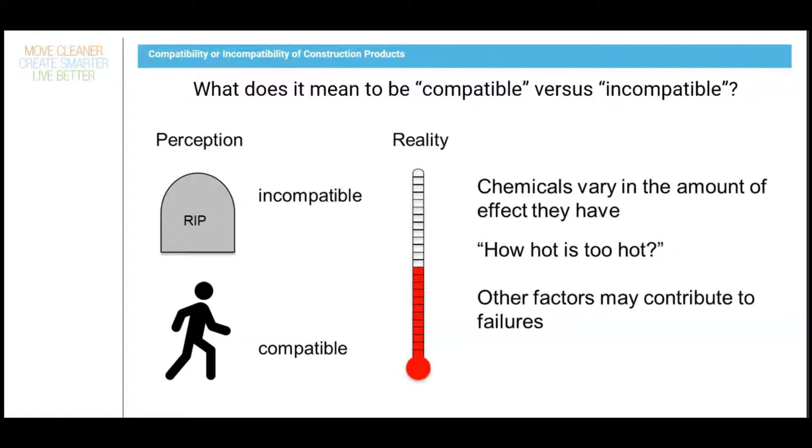So, you know, we're all familiar with the fact that metals can be sensitive to oxygen in the atmosphere, salt, especially if you live near the ocean, water, humidity in the air, or water from leaks in the building, something like that. The quality of the water, if the pH is too high or too low, microbes growing inside that stagnant system. Everybody's seen the effects of galvanic corrosion here and there, and stray electric current can also affect metals. Some of you may have switched to CPVC in order to combat some of these effects that can cause metals to fail.

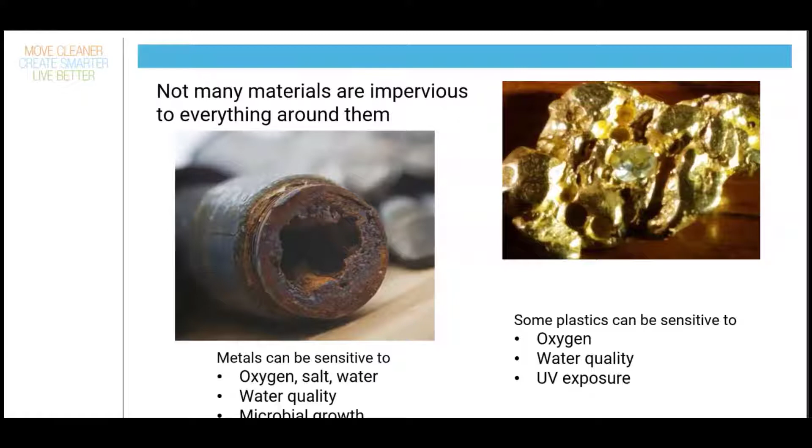So some other plastics can also be sensitive to some of those things: oxygen in the atmosphere, the quality of the water that you put into the pipe, and UV exposure from sunlight or from some types of lighting in buildings can also affect certain types of plastics. CPVC is really, really resistant to those types of environmental effects. So if you'll move to the next slide, Lainey. Those types of things that are out of your control, like whether there's humidity or salt in the air, whether the pH of the water is too high or too low, whether there's UV present around the building, those things that are kind of hard to control, CPVC is actually highly resistant to.

And in the fire sprinkler industry, You may not know that CPVC is also used in industrial applications. We make industrial pipe out of it as well. It's used for handling really strong acids, really strong caustics, peroxides, very corrosive chemicals. And in industrial applications, it's frequently installed outdoors for decades without any problems. So it's really resistant to those kinds of things.

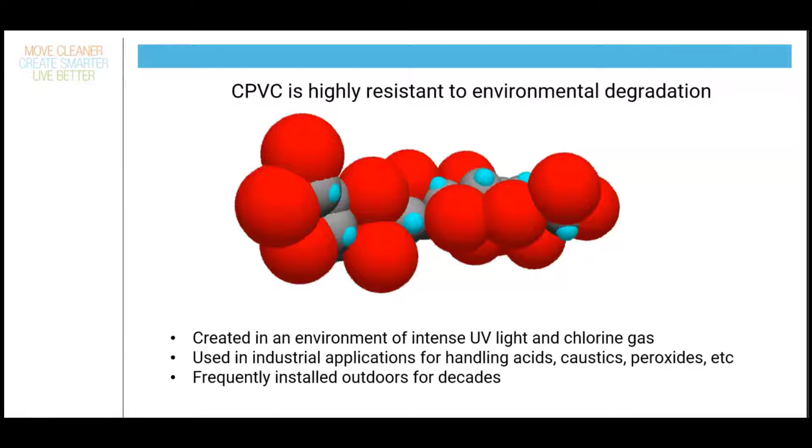However, CPVC can be caused to fail by a process called environmental stress cracking. And that can be triggered by a few types of chemicals that can be found in construction type environments. But in order to understand how that occurs, we need to understand what's holding that plastic together as a solid. And so we're just going to touch on this really quickly. And we're going to start on the right side of the screen.

Some plastics, like that fiberglass ladder you crawl up every day, those are held together with cross links. The molecules are actually tied together chemically. And those bonds can't really be melted or dissolved. That's a very strong way to hold plastics together. That's not CPVC.

In the middle, some types of plastics, like polyethylene sheeting, you're probably familiar with, that's held together by crystallization. So the molecules pack together in tight little bundles, which is what's represented by all those parallel lines you see in the middle of that squiggly picture there in the middle of the screen. So those tight little bundles can be easily melted by heat, but they can't be easily dissolved by chemicals. And so these types of plastics aren't very sensitive to environmental stress cracking.

But CPVC is an amorphous plastic, which is what's represented on the left there. It's held together just by molecular entanglement. All the long chain molecules of CPVC are just tangled together, and that's what holds it together as a solid. So this type of a plastic can be softened, but surprisingly not melted. CPVC does not even have a melting point. It doesn't melt.

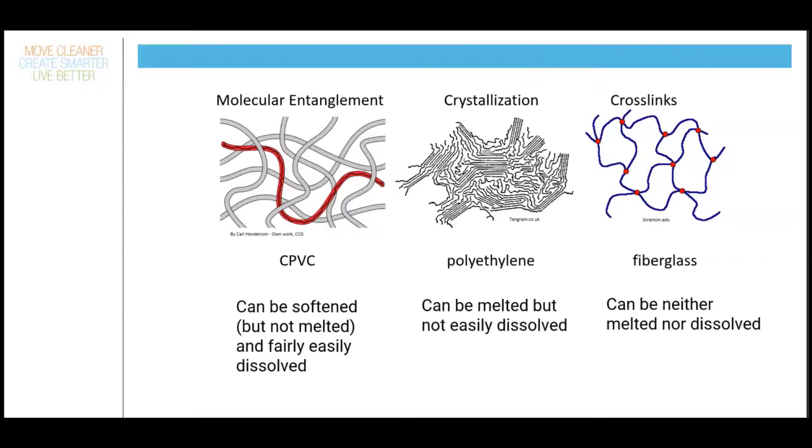But this type of plastic can be fairly easily dissolved. Now that's a good thing when you're talking about solvent cementing. It makes solvent cementing possible. The fact that you can dissolve the surface of the pipe and dissolve the surface of the fitting and force that pipe and fitting together and make a chemical weld. However, it also means that other types of chemicals can affect the plastic as well. So if you'll move to the next slide, please.

Now, if you remember back at the beginning, I said that other things besides the chemical can affect the plastic as well. Other things are contributing to the failure. And to illustrate this point, I like to use the fire triangle because we're all familiar with that in the fire sprinkler industry. You need 3 factors to make a fire happen. You need fuel, heat, and air.

And if you remove any one of those factors, you don't get a fire. And in fact, that's the whole point of extinguishing fires, is either to remove the air or the heat or both to make the fire go out. So it's very similar with environmental stress cracking of plastics. It's not just the chemical. There are mechanical stresses that can contribute to the failure, and the material and part properties as well.

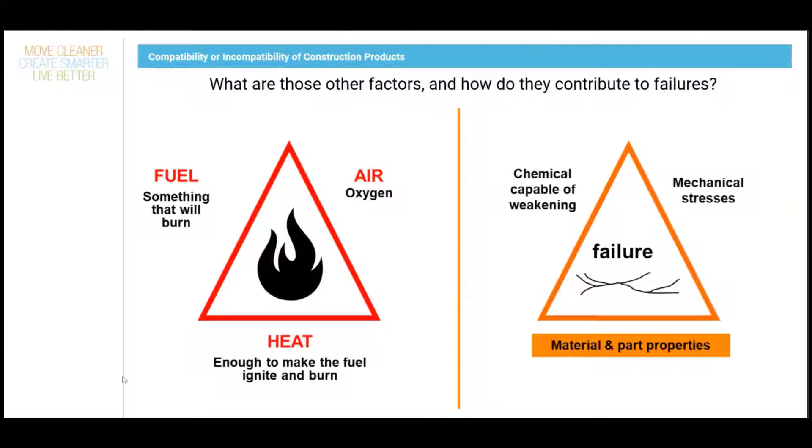And we're going to touch on material and part properties really quickly and touch on mechanical stresses quickly, and then we're going to talk about the chemicals themselves and where you might find them. So on the next slide, we're going to talk about material and part properties. Here's our little armadillo of a molecule again. This is the CPVC itself. That's, of course, a really blown up representation of a single molecule.

When you look at it in person, it's a white powder. We add other ingredients to that white powder and pigments to make it orange, and that makes the BlazeMaster material, which is what Lubrizol sells, and it comes in powder or pellet form. We sell that to manufacturers like Tyco or Viking, who turn that into pipe and fittings. And so if you think back to my picture of molecular entanglement, you've got all these individual grains of powder that you have to make into a solid piece of pipe or a fitting.

And so you need to get all of those molecules that are in those individual grains mixed up and entangled very well. And that's not necessarily easy to do. And so the whole point of this slide is that it's very important to choose a supplier that has a high reputation for quality manufacturing.

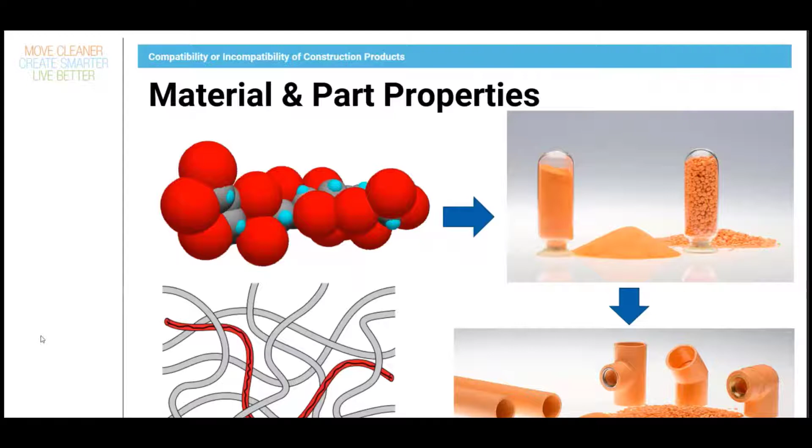So moving on to the next slide, we're going to talk about mechanical stresses. So the chemicals, if you think about that entanglement of molecules, it's kind of like a plate of spaghetti, really. If you have no olive oil on your spaghetti, it's hard to pull the strands apart. You put a little olive oil on, and that chemical acts as a lubricant to help you pull those spaghetti strands out. Similarly with the molecules, some chemicals can act as a lubricant to disentangle those molecules.

But you still have to stick your fork into the spaghetti. You still have to apply some kind of stress to pull those molecules out. And so sources of stress in a piping system, some of them are really obvious. There's pressure inside the piping. It's got to support its own weight. You're aware probably that there's an interference fit in the fittings, so that the bottom of the socket is a little bit smaller than the outside diameter of the pipe. That makes a nice tight joint and a good solvent weld when you're solvent cementing, but it does put stress

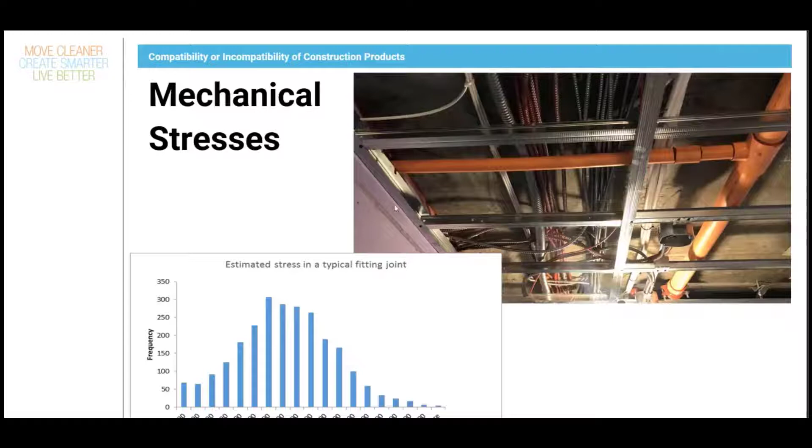So moving on to the next slide. A lot of people are kind of confused and maybe overwhelmed a little by chemical compatibility. It seems like there's a lot of things that could be incompatible, but it really boils down to three different types of chemicals, really just three different types. One is plasticizers, which is a chemical that's used to make rubbery things soft and rubbery, or to keep them rubbery throughout their lifetime. The other type is natural or synthetic lubricating oils.

And at this point, I like to make the point that it's not petroleum. Everybody's probably heard in the industry that petroleum oils can harm plastics, but good old mineral oil is actually pretty highly compatible with CPVC. When I'm talking about oils that are incompatible, I'm talking about natural types of oils. So things that would be advertised as green or environmentally friendly or vegetable based, those types of oils can be incompatible with CPVC, and their synthetic equivalents as well.

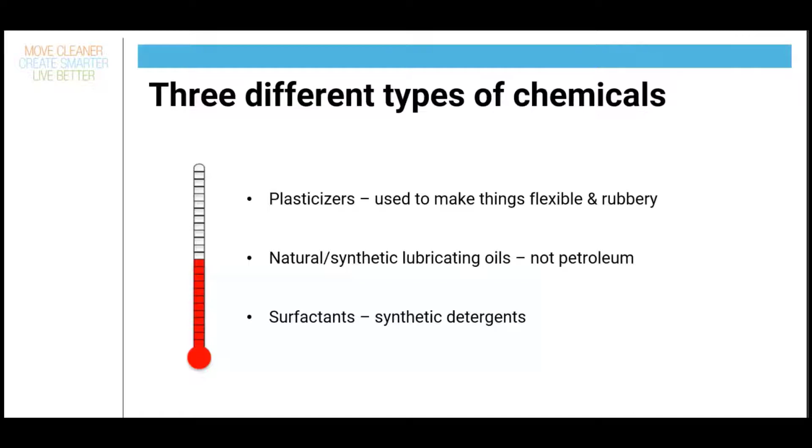And then the third type of chemical is surfactants, which is a chemist's term to describe soaps or synthetic detergents. Now, not every kind of soap is incompatible with CPVC, but there's one particular class of synthetic detergents that can be an environmental stress cracking agent for a lot of different plastics, including CPVC. So on the next few slides, I'm just going to give some examples of where you can find these types of chemicals, things you need to look out for, and maybe ask a question if you see this kind of product in contact with the CPVC piping.

So on the top left, you see communications type cable, and it is particularly communications type cable that is of concern. The ordinary Romex type wire that carries just electricity around the building to outlets and fixtures and so forth, that has a different type of jacketing on the outside. But communications type cable, that soft rubbery jacketing on the outside of that type of cable, can contain plasticizers to keep that rubber soft, and anything that makes that jacketing soft can also make CPVC soft or weak.

And so then on the bottom left there, you see caulks and fire stops. There's another rubbery type of material that can often come in contact with CPVC, and they can sometimes use plasticizers to keep those caulks and fire stops soft and rubbery throughout their lifetime. So some of those may be incompatible as well.

On the top right, you see some black tubing insulation, and I've particularly made the point that squishy tubing insulation is the one that we are concerned about. If you've been to Home Depot, you're probably aware there's two different kinds of tubing insulation you can buy. One feels kind of crisp, like a pool noodle toy. That one is typically compatible with CPVC, and you shouldn't worry about that one.

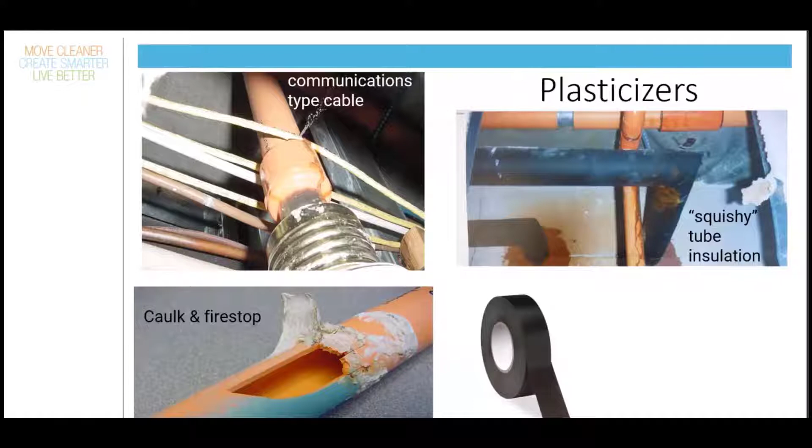So on the next slide, we'll talk about vegetable oils or synthetic lubricants and where they can be found. One of the most common places is incompatible thread sealants. You can find a lot of compatible ones on the System Compatible program, which Lainey's going to talk about in a few minutes. But some types that aren't listed as compatible with CPVC may contain vegetable type oils, which are incompatible.

I mentioned cutting oils when we were talking about oils in the first place. So particularly, again, what I'm talking about here is green or environmentally friendly or vegetable-derived cutting oils. The good old mineral oil-based cutting fluids are typically compatible with CPVC.

And then one thing that actually comes up occasionally is kitchen grease. If you've ever cleaned your kitchen at all, you know that when you cook, the grease can rise and then settle down on things in the kitchen, and it has to be cleaned off. If the piping is behind the ceiling, like it is in the picture you see here, that's not going to be a problem for the CPVC.

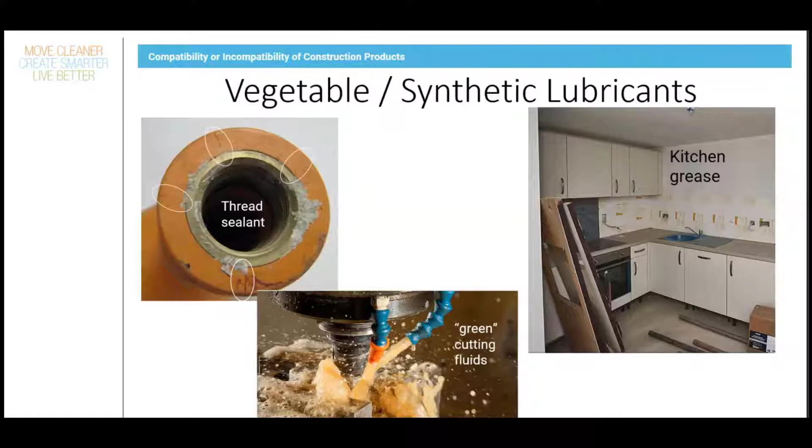It doesn't typically get past the ceiling, but in a few cases I've seen where it's been exposed in a place where kitchen grease can settle down on it, and kitchen grease is of course vegetable oil or animal fat, and that can harm the CPVC. Anyway, like I said, kitchen grease, if it's behind the ceiling or behind something that's going to protect it from the grease settling on it, that won't be a problem. But if it's exposed, then it really should be protected from having the grease settle on it.

The next slide, please. And synthetic detergents. I couldn't come up with any pictures for these except a picture of a piece of pipe that actually failed due to synthetic detergents, because they're liquidy things. They don't look any different. But they can be found in things that you would expect to find soaps and detergents in. So leak detectors, cleaning products, disinfectants, mold and mildew treatment.

And this picture actually demonstrates the stress that is in the fitting sockets. So I said, you know, because of the interference fit, there's stress on the fitting sockets. So when you put these types of things on the outside of the fitting, the highest stress point typically is the fitting sockets, and that's what will fail with synthetic detergents.

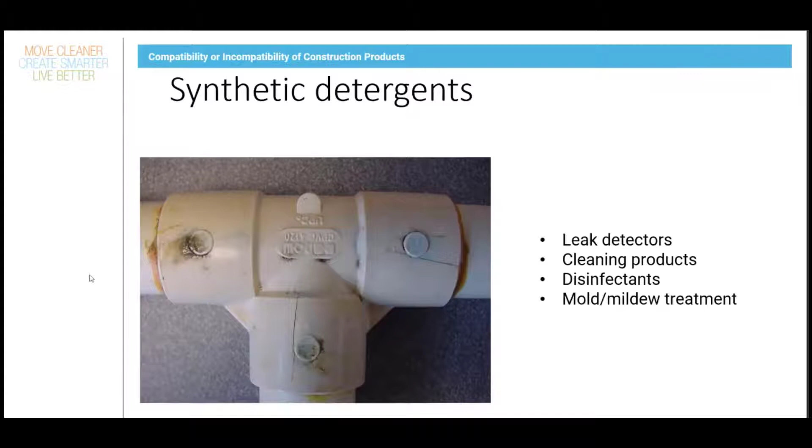So moving on to the next slide, this is something that's kind of a special case, and it's a frequently asked question. So I did want to talk about it here. Spray polyurethane foam, is CPVC compatible with that? And the answer is yes and no at the same time.

So as you're aware, polyurethane foam is a two-part product. You mix part A with part B, and it reacts and foams up to make the insulation. And what you want to see is what you see on the left-hand side there.

It's all well foamed, there's no discoloration, everything is well reacted, and it looks very uniform. CPVC is actually not compatible with either part A or part B. So if it doesn't react well, if you have an excess of part A on the plastic, like you see in the center on the bottom there, then you can get cracking of the plastic. It doesn't foam up very well, like you see on the top right. It's actually the foam structure that allows polyurethane foam to end up as compatible with CPVC if it's done right.

So like I said, it's not compatible with part A or part B, but once they've reacted together, the A and the B are effectively gone, and they've turned into that rigid foam. And the additives that were in part A and part B are now lifted up off the surface of the CPVC by the foaming, and there's all these bubbles present in between the additives and the surface of the CPVC. Effectively, the additives can't transport themselves around all those air bubbles, and so they never get back to the CPVC surface.

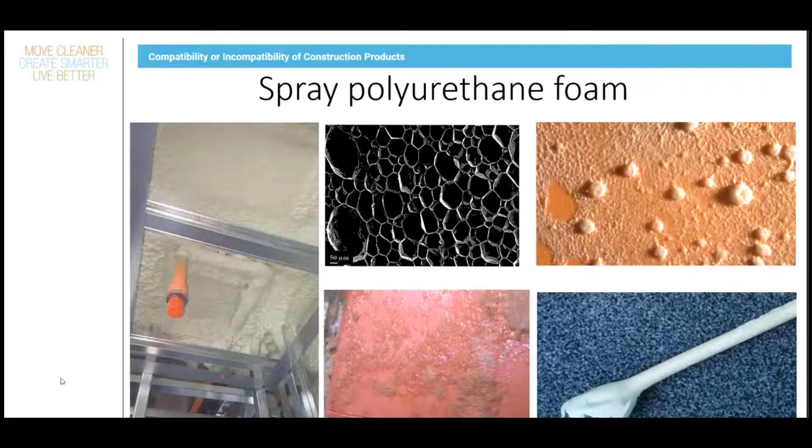And certain types of paint, like two-part epoxies, again, CPVC wouldn't be compatible with part A or part B, but once it's cured, it's fine. So as long as the paint gets applied in a normal way and it dries or cures in a normal amount of time, you're not going to see an issue with compatibility. But in those weird cases where you might have a big puddle of paint spilled around the pipe or something like that, then you might need to have some concerns about whether that's going to harm the CPVC.

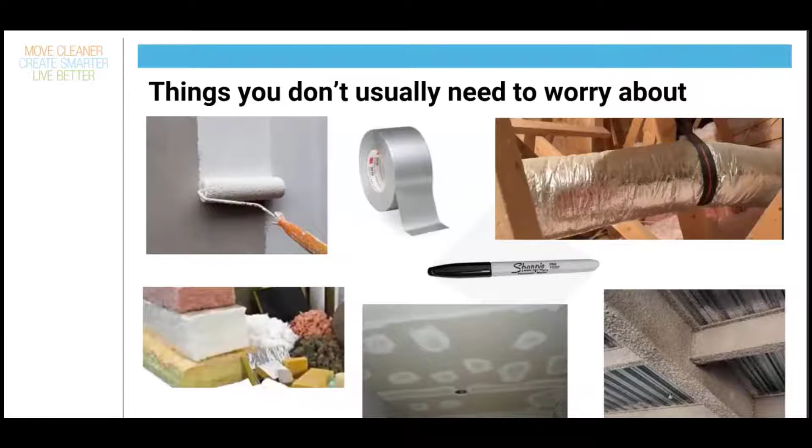And on the bottom right there, you see spray applied cementitious fireproofing type materials. Those are also compatible with CPVC and nothing to worry about as it comes to compatibility. So those are some of the most commonly asked questions which have answers that are, don't need to worry about that. Lainey's going to talk now about the System Compatible program.

So I will let her do that. Great. Thanks so much, Michelle. As always, that was an excellent presentation of compatibility, and it's always great how you can simplify it into things that people can understand, or at least I can understand, not being a chemist. So I really appreciate that.

So to kind of put a bow on it around compatibility, Lubrizol has a program called the FBC System Compatible Program. And what FBC stands for is FlowGuard, BlazeMaster, and Corzan. And those are 3 brands of CPVC that Lubrizol manufactures, or we manufacture the compound for those 3 brands of CPVC. And what the System Compatible program does is it just eliminates the guesswork out of compatibility on a job site when it comes to BlazeMaster.

We invented CPVC and we invented the CPVC compatibility program. It's the oldest and most comprehensive, most robust program in the industry. We do not do the testing ourselves, and contrary to popular opinion, we do not profit from it. It is tested by a third-party lab for compatibility and either approved or not approved for our list by that lab.

And then the lab actually tests the manufacturer's products that are on our list annually in order to make sure that the formulation hasn't changed or that no incompatible product has been introduced into the formulation, etc. So it's an annual process that's checked just to make sure that we're being as safe and as reliable as possible.

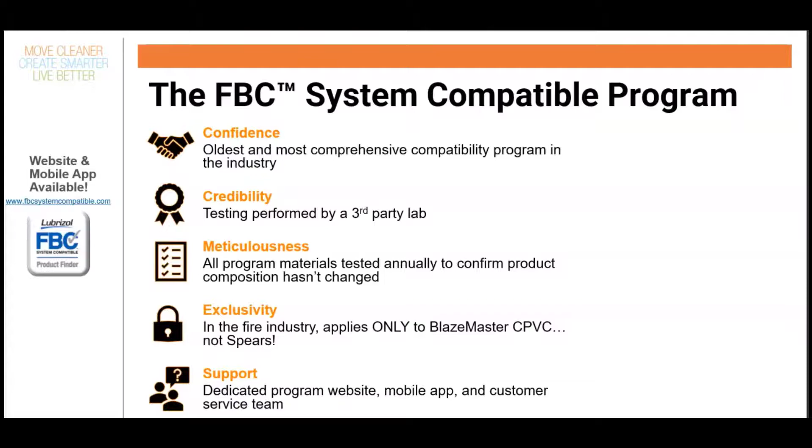But what I wanted to do is just take the opportunity to go through how to use the website real quick. Because I'm not going to lie, it isn't the most user-friendly, but I think there's one very important part of the site that a lot of people miss. So if you go to fbcsystemcompatible.com, or you can go to blazemaster.com and click on a compatibility link, you'll be taken to this page.

Now, to find a compatible product, you go over here to the right and click Find FBC System Compatible Products. Here you can select the category of what type of product you're looking for. So we'll just do firestop collars, for example. You can select your region, and then there's a list of compatible products.

Now obviously, not every single compatible product can be part of our program. So if what you're looking for is not on our compatibility list, we do recommend using a product that is on our compatibility list, because it just takes the guesswork out. It's a lot easier just to move forward with a product that is already approved. But in the case that it's not, you're not done yet.

The second step should be finding incompatible products. So you go up to the right-hand side and click Incompatible Products. And then, as Michelle mentioned, there are different levels of incompatibility. It's not just compatible or incompatible, or dead or alive, as she mentioned. So we have products listed that we know to be a certain level of incompatible with BlazeMaster, and we list those products here.

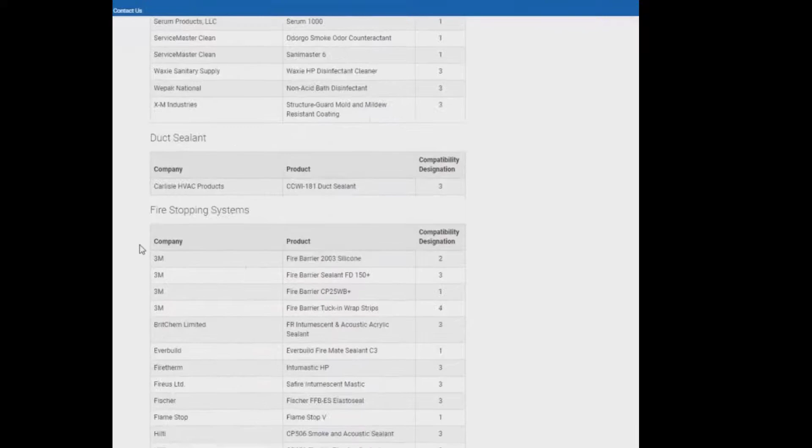So if you're looking for a firestop collar, you should go down to that section and make sure that the product you are looking for is not listed on that list. And you're still not done. And this is the part that I think a lot of people are unaware of, that will be really helpful to you guys in the field and when you're dealing with builders and other trades on the job site: this section called Other Compatibility Topics.

If you click on that, it takes you to a list of basically every type of category that you can find on a job site, and tells you what you should look for in the ingredients of an ancillary product on the job site that are known to be incompatible or compatible with CPVC.

It's a lot of guidance. There's a ton of guidance on what it is, what isn't, things you should look at in the SDS. And I think that this is probably the most helpful part of our website, and can save you a lot of time in sending an email to the product manufacturer or to us and going back and forth, because that's probably the #1 question that we get through our inbox: is this compatible? Is this compatible? Is this compatible?

And really what we do is we just kind of screenshot the website and send it back to you in an email. So what you should do is you can get that information yourself by going to fbcsystemcompatible.com and going to the Other Compatibility Topics page, and you'll see there's just a ton of guidance on different categories of building products. So hopefully that is something sort of new that you learned.

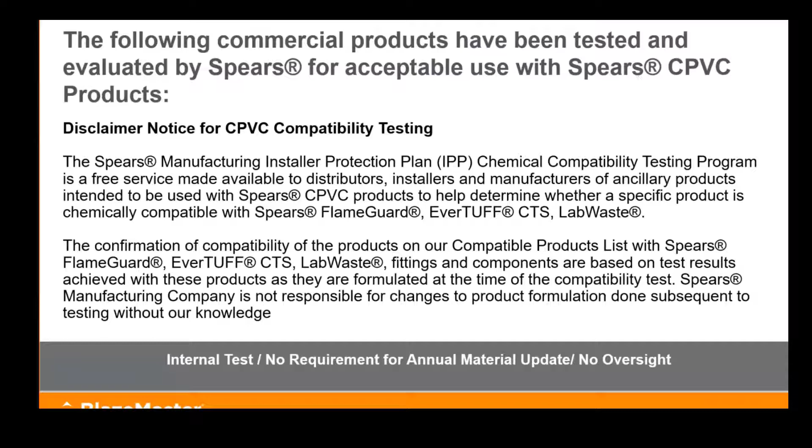So with that, I think it's time to move into the Q&A section. I see a lot of good questions in the chat. So I think we will start out with, John and Sean and Michelle, if you could join us again, that would be great.

One thing I definitely wanted to talk about before we get to some of the questions is if there's a product that's not on the list on our FBC system compatible program, and you can't find the guidance that you need on the Other Chemical Compatibility Topics webpage, what do you do? And John, I think you're probably a great person to answer that.

Thanks, Lainey. Well, NFPA 13R a couple of years back did a good thing, and they actually are requiring you to prove compatibility for all ancillary products when you're doing a CPVC system, which really is front end stuff and it really avoids a lot of the problems. But unfortunately, you have a lot of ancillary issues that may come up. First, we would like you to possibly contact directly the manufacturer of that product.

And I'll tell you why, because a lot of times people ask us to look at a certain product, and it's really hard to make a good determination because there's a lot of things that happen. One, sometimes we don't get all the information. Sometimes it might be dated. And typically what we see with SDS sheets is you don't have all the ingredients. And a lot of those typically are proprietary to that specific material.

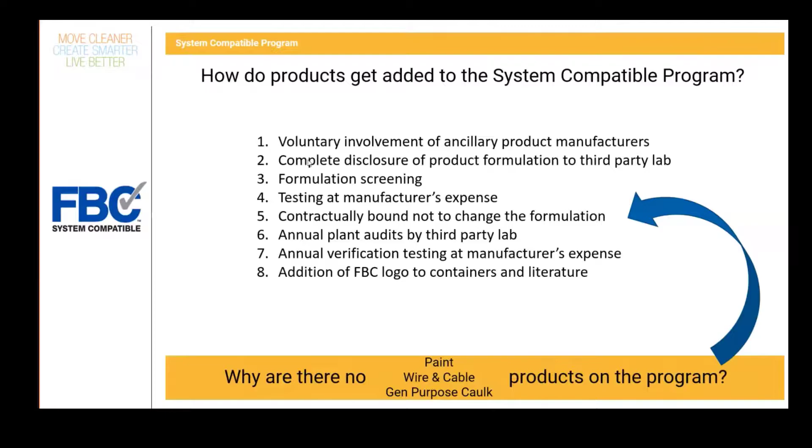And second of all, I think we already addressed that you should go to the manufacturer first, and then we can always jump in as needed if it's something not on the FBC program. But in regards to the job site itself, who is responsible for compatibility? Typically at a job site, the first person is going to be the contractor to really look out after his own work. And it's important that he has that conversation.

This is all pre-planning of the job site to really educate the general contractor and some of the contractors he may be working with. Your painter who may be applying an antimicrobial coating, or your insulator who may be using spray foam, may not be familiar with the process of using their product with our pipe. So doing a lot of front end work to make sure everybody's on the same page and everybody safeguards, keeping an eye out through the course of the project, is really the best recommendation we can give.

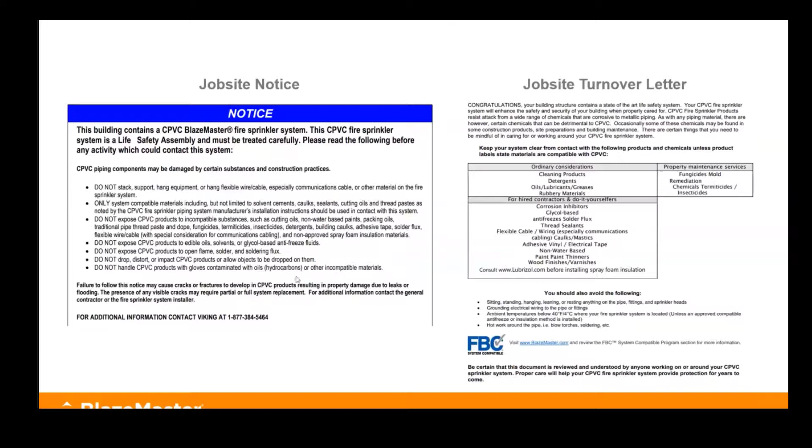Thanks, Sean. And if anyone is looking for where to find these job site notices or the turnover letter to print out, what you can do is go to the pipe and fitting manufacturers' websites. But what we recommend for BlazeMaster is just going to blazemaster.com. You click on the Buy tab, and then you select whose pipe and fittings you're using, whether it's Tyco, JCI, Viking, or IPEX. And then the links to all of the installation resources, including the installation guide, the turnover letter, the job site notices, and even more are right there on the website. So that's an easy way to remember where to find it instead of having to dig through everyone's website.

So I think the last question before we get to the Q&A is, a lot of people ask us about using compatibility barriers. So do people use those in the field? And if so, how and what have you seen? So there's a number of things. Of course, our pipe is specially listed, so you have to maintain our listing as well. Typically, what people will do is take a batt of fiberglass insulation and separate something that they might consider to be incompatible with the pipe. There are other things you can do to separate it as well, but AHJs are often looking to identify something that may not only be incompatible, but may be a contradiction to the listing. Fiberglass is probably one of the safest things you can use.